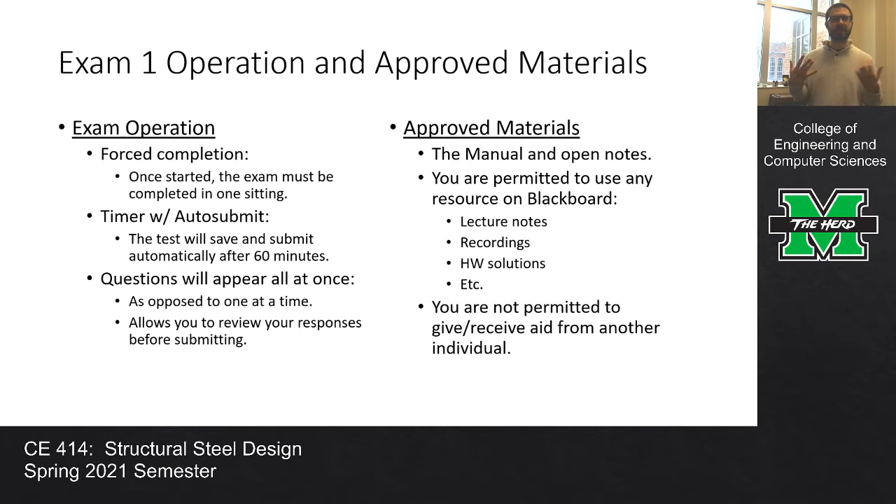But again, I don't think that this exam is going to be the most challenging thing in the world. If you've been paying attention to what we've been doing, this stuff really isn't all that difficult. There are some questions I can ask you that'll make you think, but it's not outside the realm of possibility. The exam format will be very similar to the exams I've given in the past.

There'll be 4 to 5 short answer, sort of conceptual questions. One of the things I'll say about that is don't write a dissertation on a problem that's worth 2 points. Just answer the question and move on. You really shouldn't be responding with more than 1 or 2 sentences.

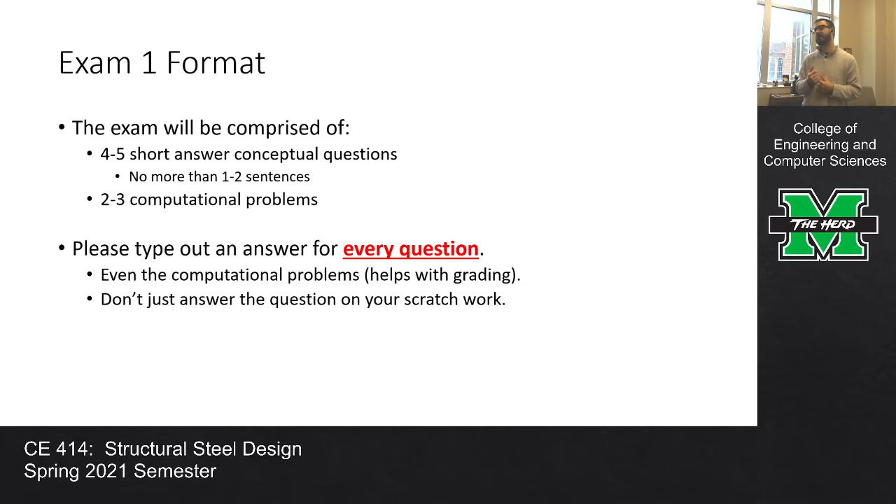There'll be 2 to 3 computational problems that you actually have to do some math on, and that'll be the bulk of the exam in terms of the grade. Do me a favor and type out an answer for every question, even the computational ones, because it does help out with the grading. Don't just answer the question on your scratch work. Again, type it out. It does help.

Let's talk about the topics on the exam. You can fit all the topics that are on this exam on a single page. What do we have on exam 1? We're going to cover the fundamentals, which is make sure you generally know what the process of structural engineering is.

We talked about that during the first lecture, and that you know the difference between ASD and LRFD. Then for the star of the show, which is tension members, make sure that you can analyze a tension member according to the following limit states: gross section yielding, net section fracture, block shear rupture, and slenderness limits, and that you can design economical shapes for prescribed loadings. And when I say most economical, I mean the lightest weight.

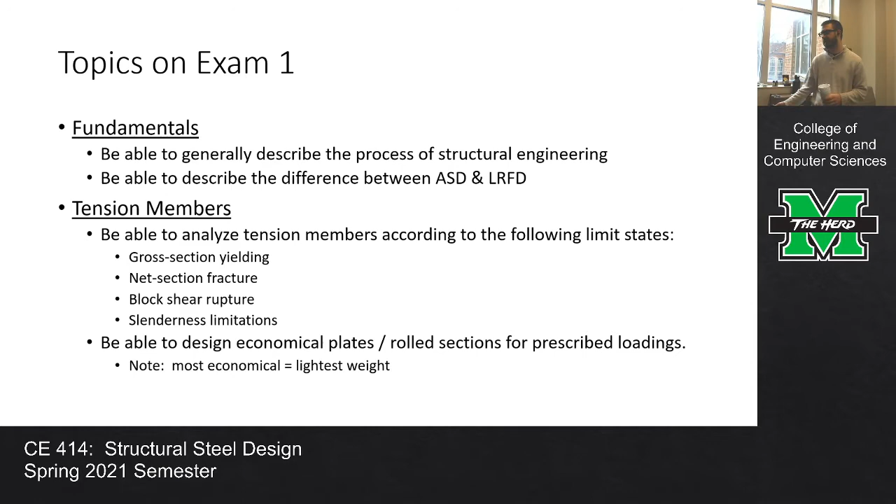So that is everything that we've talked about up until this point in a very concise slide. As for some references for you, and I always try and do this on the exam review slides, I try and put everything in one presentation so that you don't have to start digging in multiple slides. They're there if you want, but I really want to try and make it easy on you.

So first off, LRFD, I want you to understand the process. You've got factored loads and factored resistances. So how does that work? You take a nominal resistance, you factor it by a phi value to get a factored resistance, and then you take loads and combine them in those statistically calibrated load combos to get a factored load. As long as the factored resistances are larger than the factored loads, the structure is safe.

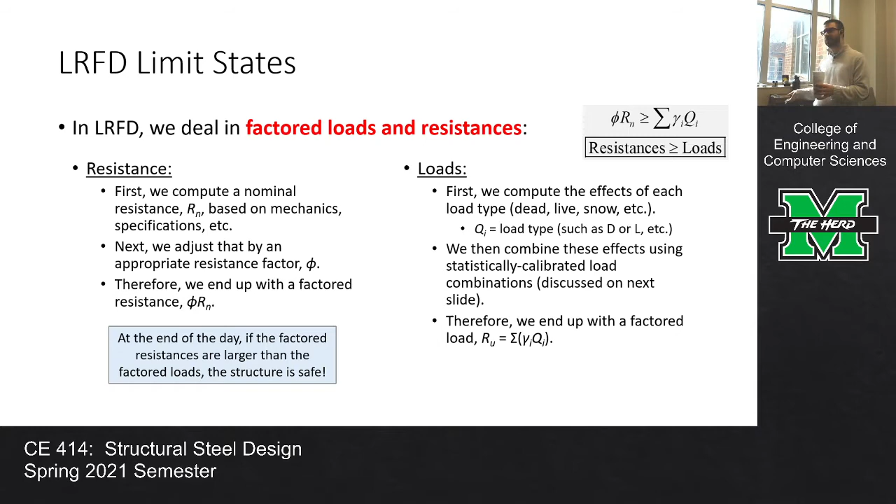What about those load combos? Here's the load combos—there are 7 load combos. Predominantly, the first and the second one are the ones that end up being the star of the show, but generally you should be going through all of those and finding the largest one that governs. So generally that's what you do, but specifically, usually the first 2 end up governing because dead load and live loads tend to be on all members.

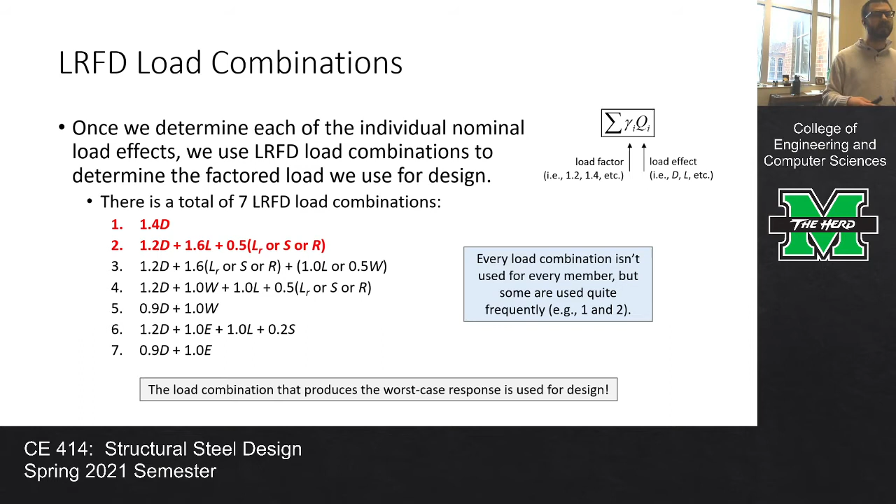Now, I'm talking about this for the purposes of our exam on Wednesday. More than likely, those 2 are going to be the ones that govern. In real life, you have to go through them all, but it comes down to context, and software can help you out with some of that.

What about those ice loads? That's a good question. There are provisions for stuff like that in the spec. We're not going to consider it for the exam, but it is covered. Maybe we should start talking about it.

It's fun. I went outside my house after the power got restored, and I was looking at our central air unit, the box, the fan with the box. There were 3 inches of ice, just solid 3 inches. It was crazy. I couldn't believe it. I've seen snow accumulate, but it was just solid ice. Wow.

Okay, let's talk about tension member limit states. So we have gross section yielding and net section fracture. We all know the formulas here—these are our fundamentals. Now these are two of the limit states. There's a third one called block shear, which we add later.

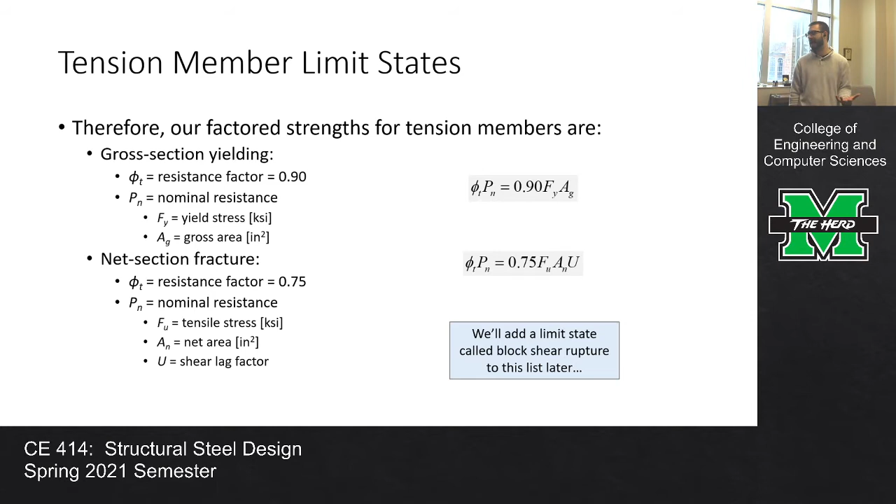In these limit state evaluations, you need some properties. The first thing you need are the properties for steel based on its grade, meaning Fy and Fu. You can find that starting on Table 2-4, page 2-48, for rolled shapes, and for plates it's the following table. Most of the values are the same in both tables, so it's not terribly necessary, but sometimes you can find grades that are unique to just one table—that's why I want to reference both. If you want to bookmark a location in the manual, that would be a place to bookmark.

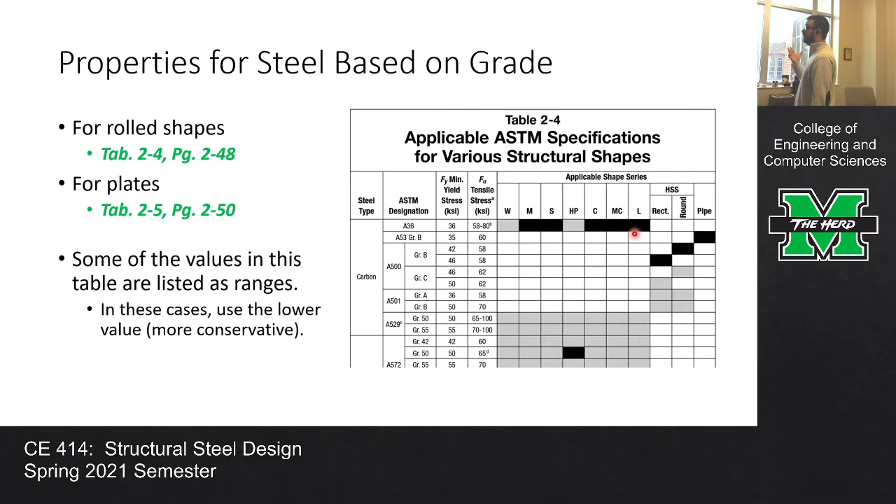Remember, there are ranges in this table sometimes. So like the A36 has Fy of 36, and then the Fu is a range between 58 and 80. Whenever there's a range, you always use the minimum, because that's the more conservative value.

All right, what about our complete expression for net area? For bolted connections, the net area is found by taking the gross area and subtracting all of the relevant bolt holes—that's the diameter of the hole times the thickness. The diameter of the hole is the diameter of the bolt plus 1/8 of an inch. Remember, we add 1/8 of an inch because we're really adding a 1/16 twice: 1/16 for damaged material, 1/16 for erection tolerance. And then we also add any necessary stagger factors.

So the stagger factor is S squared over 4G times the thickness. S is the longitudinal spacing along the direction of the load, and G is the transverse spacing perpendicular to the applied load. That's for bolted connections. For welded connections, if you have fillet welds, you're not removing any material, so the net area equals the gross area.

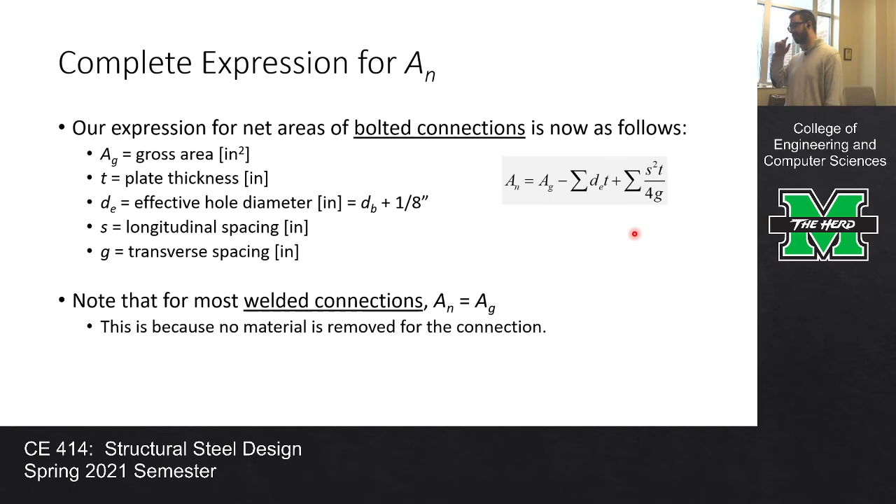Okay, what about shear lag factors? Shear lag factors are found in Chapter D, specifically Table D3.1 on page 16.1-30. That's another one to bookmark if you haven't already done so.

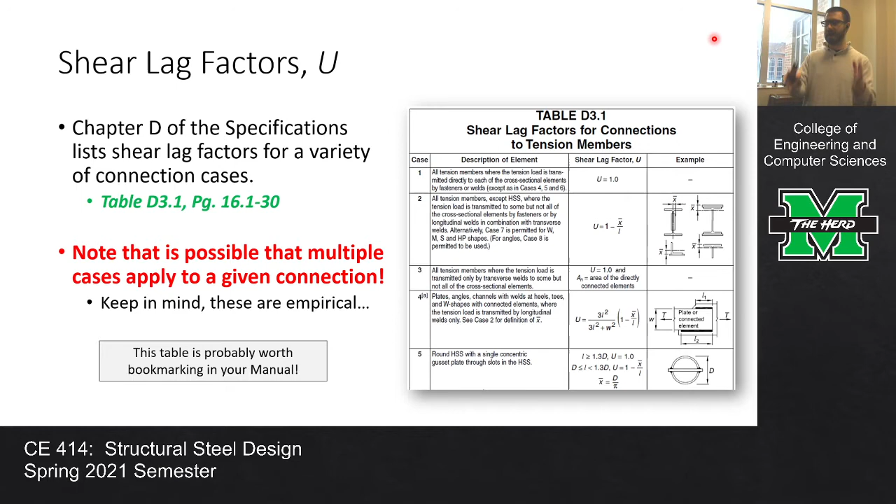Also, keep in mind that for a given connection scenario, it's possible that multiple cases could apply. So for instance, if you had a W shape connected via the flanges, we applied case 2 and case 7. We've had instances with angles where you could apply case 2 and case 8. Just make sure you're reading the table, and keep in mind that these are empirical—just follow the math, go off the table, and report the appropriate value.

For design, we design based off of gross section yielding and net section fracture. So we determine our factored load, and then we compute our two design parameters—the radius of gyration and the gross area. For the gross area, we just take gross section yielding and net section fracture. We make an assumption that the effective net area is 75% of the gross area, and that's just a blanket assumption we're making in order to get to a trial shape.

We then have to take that trial shape and assess it in order to ensure that assumption was valid, because it's possible that we make some assumptions to get to a trial shape, and then that trial shape doesn't work, in which case we would need to go to the next shape and iterate. So we have to analyze that section in order to verify its performance.

Ultimately, what we want to do is summarize those results and compute the efficiency. The efficiency tells us not only whether our section is a safe design, but whether it's an efficient design. Because rule of thumb states that if your efficiency is 90% or greater, as long as that efficiency is less than 100%, not only does it work, but it's an economical design.

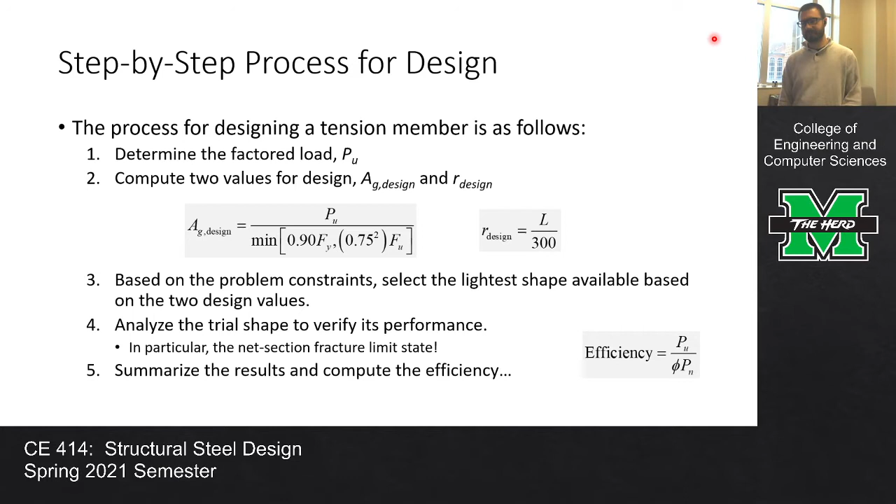Okay, now for block shear, that's sort of the new one. That's the last thing that we covered. So there's a big old expression that you plug into, and it looks nasty, but really all the parameters that go into it are fairly familiar if you understand everything else.

You understand gross and net area, so you should be able to figure out gross and net area in shear and gross and net area in tension. Beyond that, it's really not all that challenging.

You just have to, don't forget to apply your resistance factor, because that gray box will compute a nominal resistance. You need to take that nominal resistance and multiply it by 0.75 to get a factored resistance. So just make sure that if you're comparing to a factored load, you're comparing apples to apples. The load has to be factored, the resistance has to be factored as well.

And then in the expression, I guess the other point is Ubs, it'll always be 1.

One question I always get during exam reviews, I'm just going to handle it now. Dr. Michaelson, do we have to handle block shear for a staggered bolt path? No, you don't. I'm not going to worry about that, okay? I don't really even worry about that during normal conditions. But is it any more difficult than handling it for a straight path? No. All you have to do is anytime you have a tension path and you have a stagger, just add a stagger factor. But I'm not going to worry about that, so don't worry about that. If there's a block shear problem, it will not have stagger, so don't worry about that.

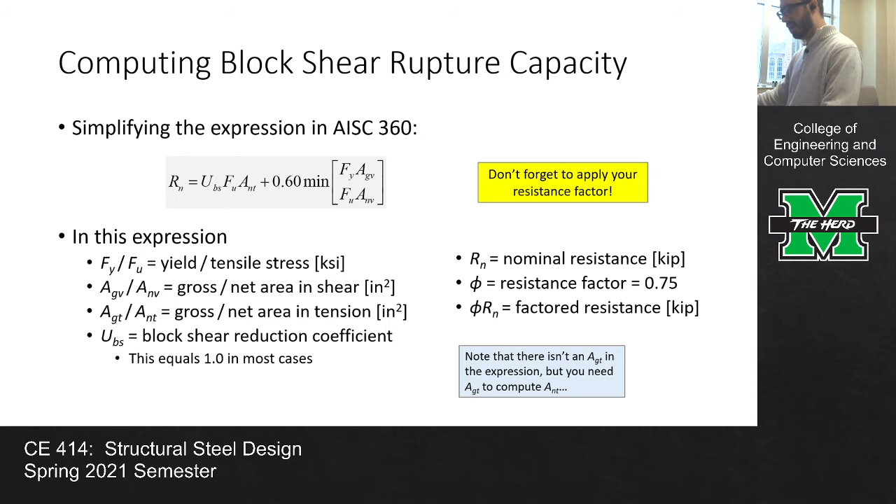Okay, that is it for what I've got here. Let me go ahead and hit escape on this. I have here a notepad if anybody wants to go through things. If you want me to pull something up, I'm going to stop talking. Floor is yours. Any questions you've got, I will do my best to address them.

So, on the exam, will we be allowed to submit our equation sheets or work separately, or do we have to submit it on the exam window? No, there's 2 forms. There's the timed exam, and then there's the submission form, right? So let me see if I can show you. I just need to confirm that there are 2 separate submission windows. Do we add it to the comment section? No, you don't add it to the comment section. You submit it as a separate document.

Well, can you just show us the problem with a staggered shear? Like, we have to determine what is the path of bolt holes, because for block shear, I believe so. I mean, I'm more than welcome to, but I'm telling you that I'm not putting that on the exam. Yeah, okay, what Harrison said would be fine.

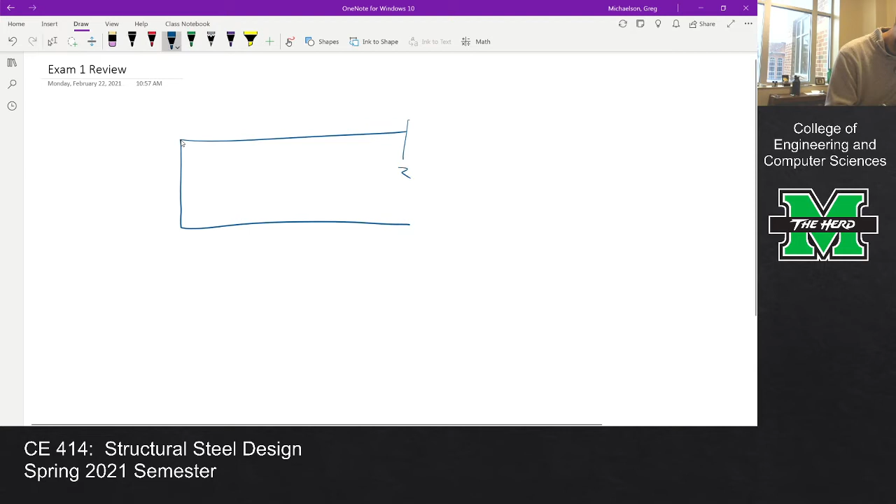Where'd my pen go? There's my pen. So, like, if you had a member, maybe your block shear path looks like this.

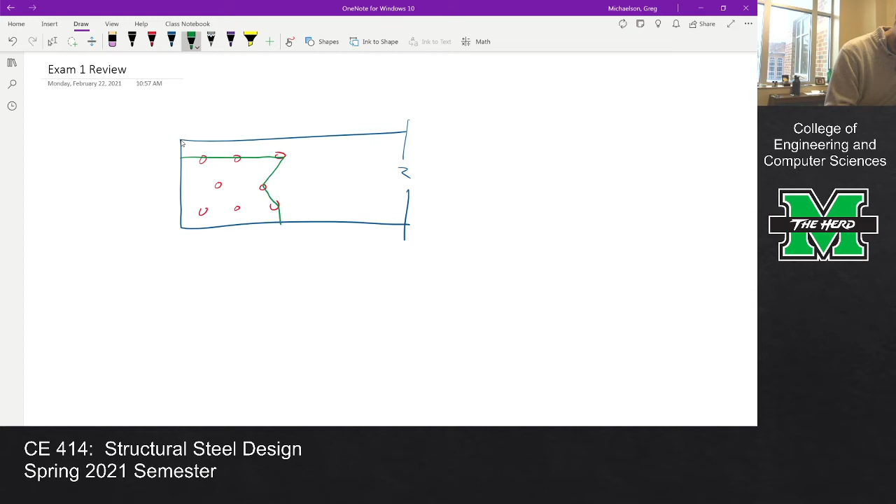But again, I'm really trying to emphasize this, I'm not putting that on the exam. All right, because admittedly the pathways are slightly confusing. That's why I'm not doing it. That's what I'm saying, I don't want to spend time in our exam review talking about something I'm not putting on the exam, because I want it to be valuable for you.

So again, floor is yours.

I feel like I'm going to get off easy today. Y'all got to make me work for a living. Sorry, well, one moment here.

Is there anything you typically see students do on exams that we should avoid?

That's a good question, a very good question. To be clear, the question was: is there anything you typically see on exams that students do that we should avoid? A few things.

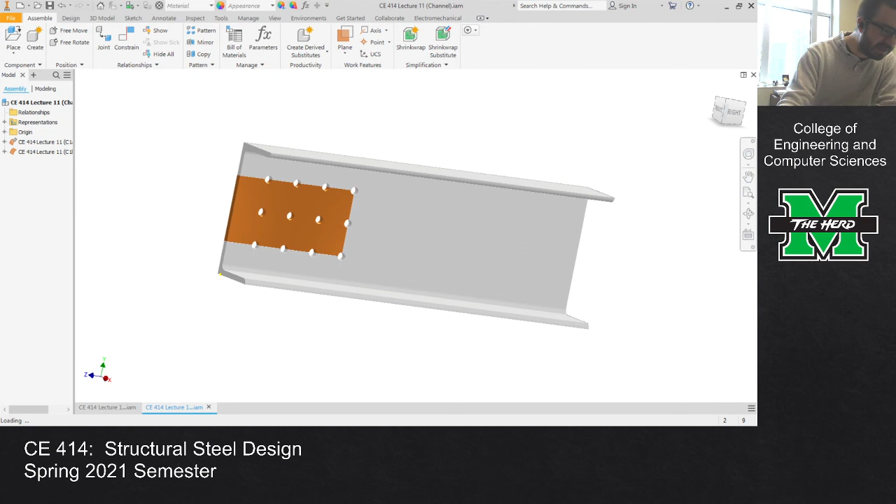Okay, so this is... all right, hold on. Let me get my little pen here because that'll work a little better.

All right, so I have here an image of 3 different potential block shear failure paths. The reason why we did what you just said on the homework was because it was this particular scenario, right? So what you would do is isolate your computations around a single block. And then because there are 4 blocks, just take the Rn for a single block, multiply it by 4.

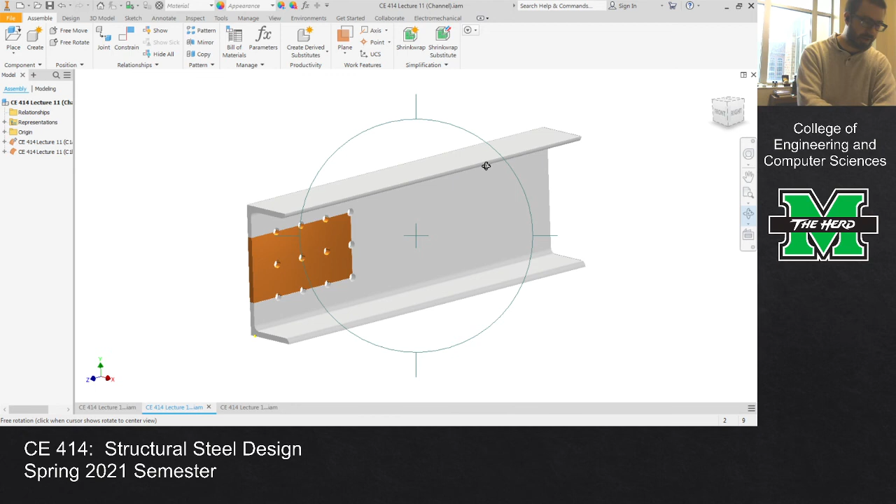For the entire connection, then multiply it by your resistance factor phi, and then there you go. You would not do that though here, right? Because here there's just a single block, right? So just compute the block shear capacity of that block, and then that's Rn. Multiply it by phi, and you're good. Same thing here, multiply that capacity by 0.75, and then you're good. No need to multiply it by 4.

All right, so this is sort of what I was saying a little bit ago. Don't just do what we did on the homework because that's what we did on the homework. If you had a situation like this, a W section connected via the flanges, then that's right - compute the capacity of a single block and multiply it by 4. But not if the scenario changes. Address the scenario, not just regurgitate what we did on the homework.

And I'm belaboring that because it's happened a lot on exams. I've seen that happen quite a bit, where you see something new and you're like, oh God, what do I do? Well, I'm just going to do what we did on homework 2.8, you know? And it can lead you astray, because one of the things you'll find about this science is that if you start doing the math and it starts not making sense, or the numbers don't quite work out, it can kind of spiral out of control, especially when you get into design sides. If you have computational errors, it can lead to a lot of iterations down the line, and I want to try and avoid that.

So, did that make sense? Yeah, if you did that on the homework, then yeah, you probably did it right.